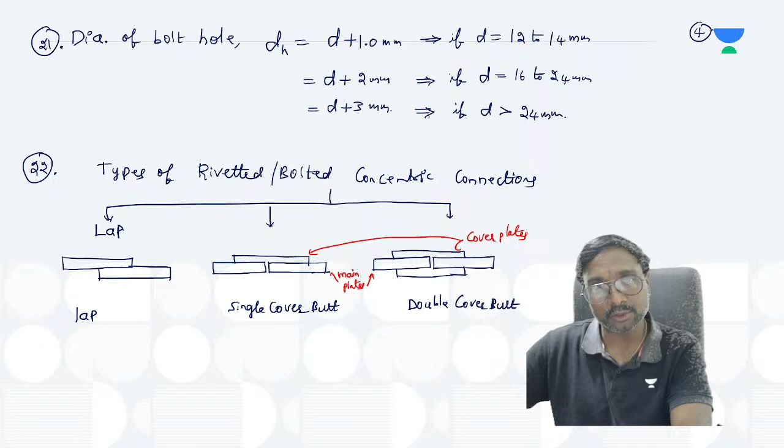And now here, what is the thickness of the cover plate? We have to take it as 1.25 times the thickness of the main plate. For which one? Whenever it is a single cover butt joint. So now the thickness of the cover plate, whenever it is a double cover butt joint, how much we have to take it, tell me?

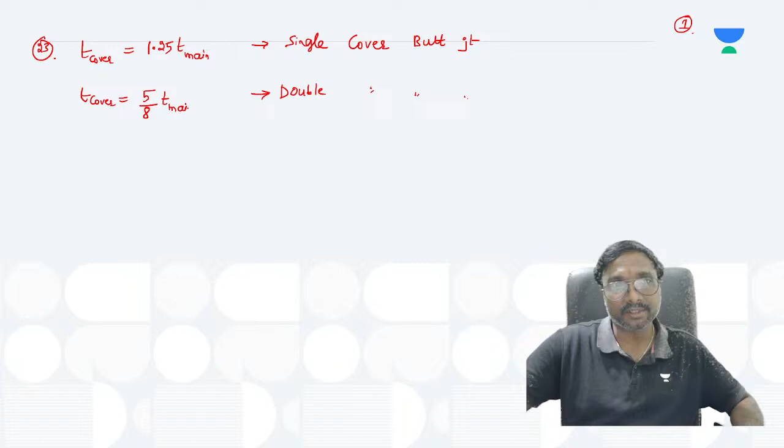If it is a single cover butt joint, like that, if it is a double cover butt joint, how much we have to take it? That is 5/8 times the thickness of the main plate. Yes or no? 5/8 times the thickness of the main plate if it is a double cover butt joint. Is it clear now? So that is the thickness of the cover plates we have to go for.

Now here, if you just observe, shall we go for this specification? If you consider what is the minimum pitch, small p is the symbol we are giving for this pitch. What is the minimum pitch? You can say it is 2.5 times phi. What is the shank diameter of this rivet given? You can say it is 2.5 times phi in case of rivet, and in case of bolt it is 2.5 times small d.

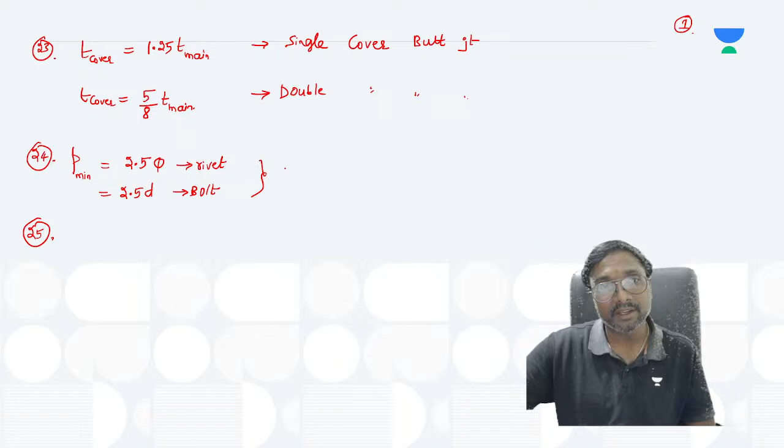Right, isn't it? Now if you observe, what is the next specification? You can say it is not d naught, it is d only. Nominal diameter, right? What is this? That small d or this phi, you can say these are the nominal diameters, not the gross diameters, if you just observe.

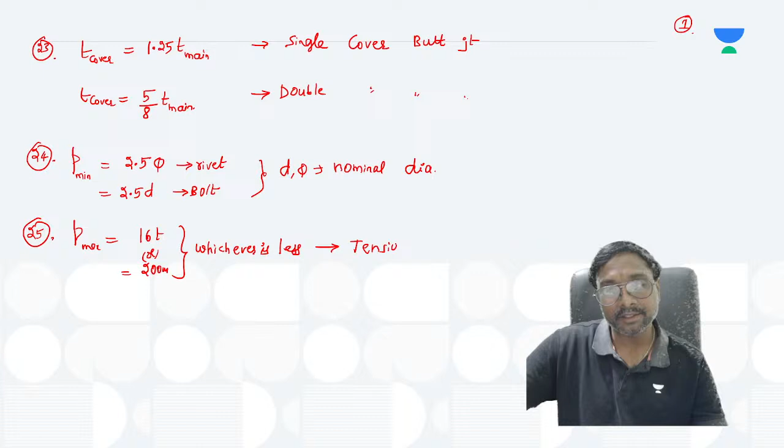So what is that P maximum? If you observe, that maximum pitch will be equal to how much? That is your 16T or 200 millimeter, whichever is less, for tension members. Whenever it is a tension member, we have to go for this. Now there is one more criteria.

What is the P maximum? You can say that is your 12T or 200 millimeter, whichever is less. So here also, whichever is less, is it for this tension member or for compression members? That is for your compression members, you can say, if you just observe.

I'll move on to the next specification. That maximum pitch only, these are for which one? These main rivets, these are for main rivets in connection, right? The rivets which are present in connection. Rivets or these bolts, whatever it is, which are present in the connection.

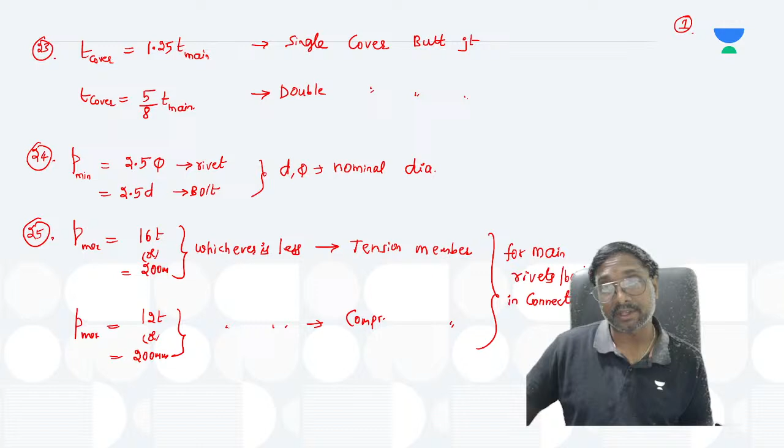As per IS 800 1984 and as per IS 800 2007, both codes, for bolts and rivets, this maximum pitch and this minimum pitch values will be the same only, you can see if you just observe.

So what is the next point? That is your 25th point. Now we will go for the 26th point. If you observe, what is the 26th point? So here, that P maximum, what is the P maximum we have to go for? That is your 32T or 300 millimeter, right? Which one we have to consider among these two? Whichever is less. This is in case of what?

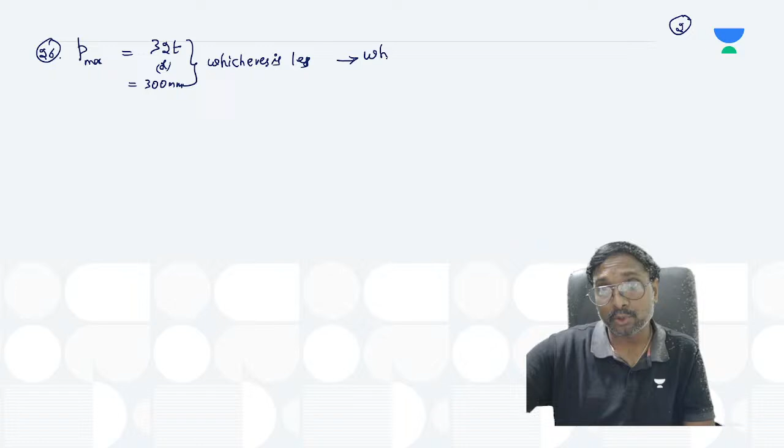This is when plates are not exposed to weather. When plates means connecting members only. When plates are exposed to weather or not exposed to weather - when plates are not exposed to weather, you can have more gap between them also, there is no issue.

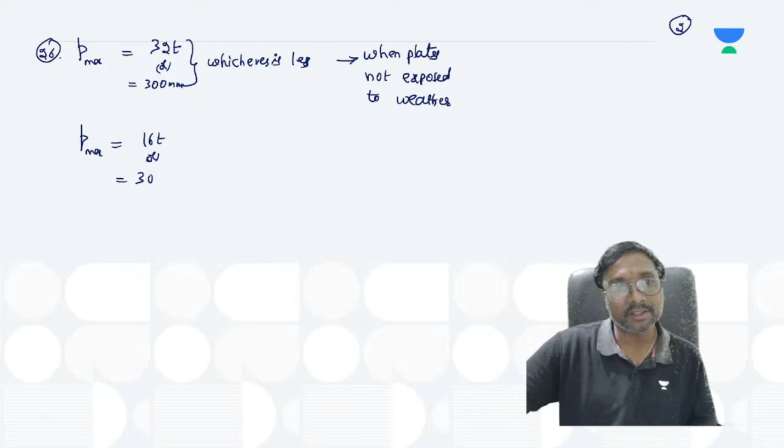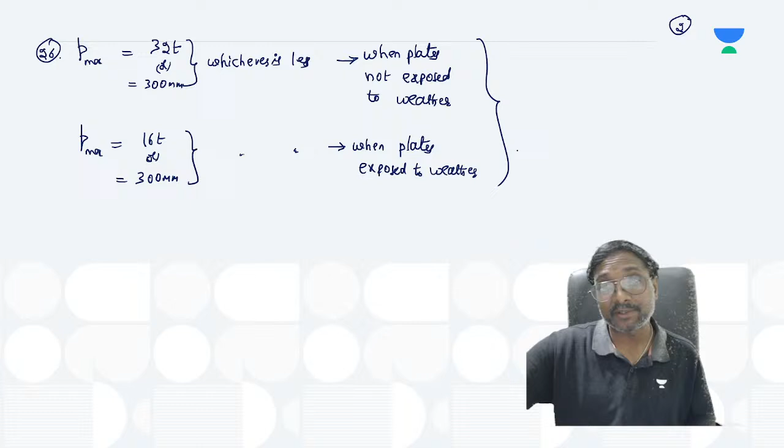Now how much do we have to take it? If you observe, that is your 16T or 300 millimeter, whichever is less. When do we go for this, when plates are exposed to weather? So these specifications are applicable for which one? Tell me, these are for the main rivets or these are for the tack or stitch rivets?

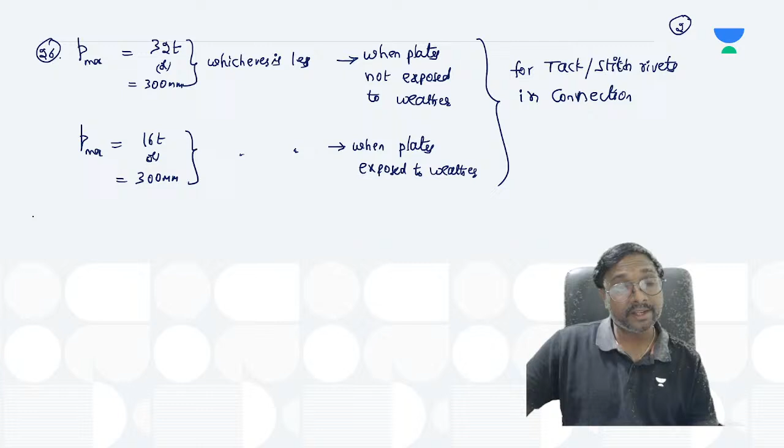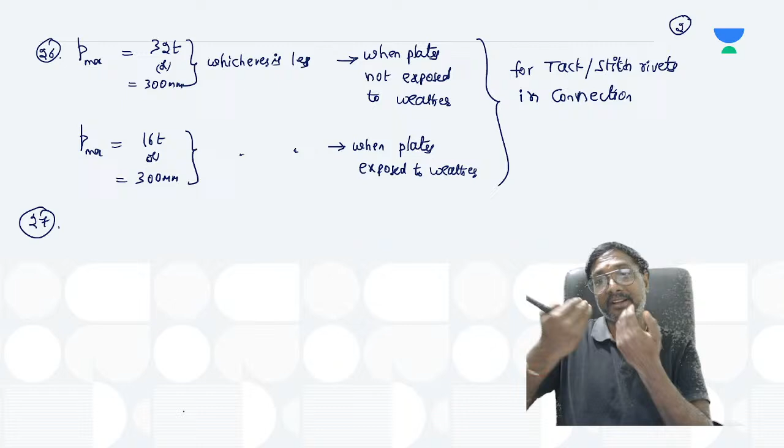Now there is one more maximum pitch value. What is that? If you observe, suppose 2-3 members are there, these are your angle members. Whenever these are connected throughout the length, there will be a tacking rivet outside the connection we have to provide just to hold the two members together, in case of this built-up section.

So now what is that maximum pitch we have to go for? P max should not be greater than which one? This is 600 millimeter for compression members.

And it should not be greater than which one? This 1000 millimeter - it should not be greater than this for which members? That is for tension members. So now this is for which one? These are also for tack rivets only.

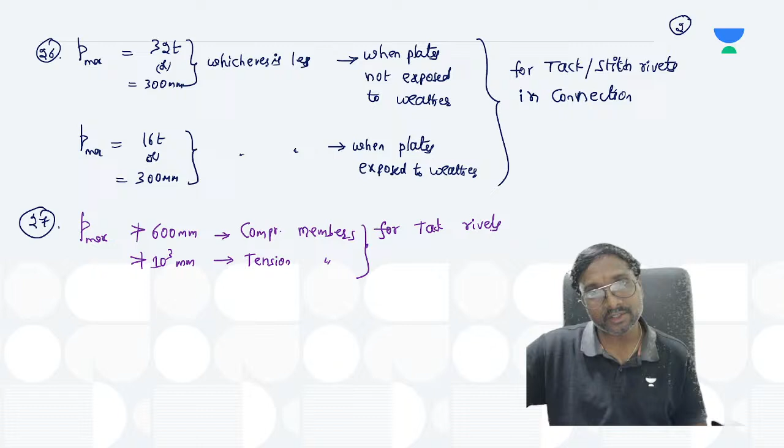Tack or stitch rivets holding the members, where they are provided, holding members of a built-up section together. They are within the connection or outside the connection - they are not present in this connection, if you observe.

Now what is that next point? Here, what is the minimum end distance? If you observe, E minimum will be taken equal to 1.5 times the DH, diameter of the hole, or that is also taken as 1.7 times the diameter of the hole.

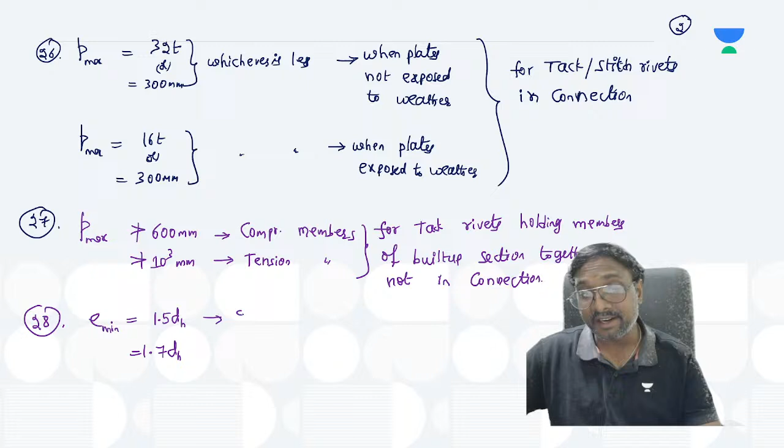When do we have to go for this 1.5 times? When edges are machine flame cut. I'll show the diagram, don't worry. So when edges are hand cut, if you observe.

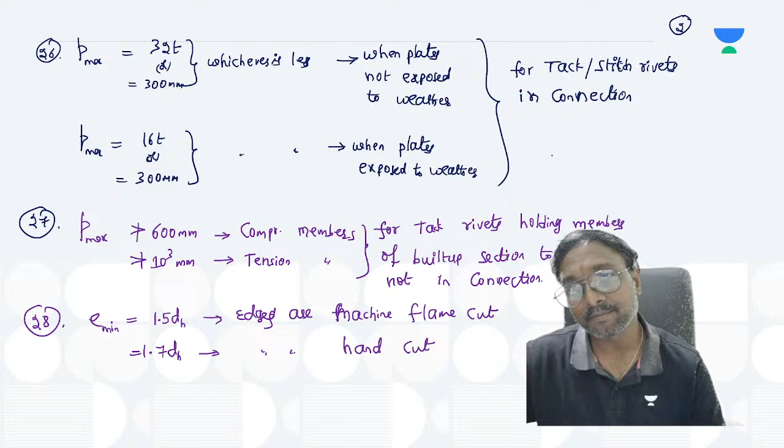So the 27th diagram, if you observe, let us say this is the gusset plate you are having, just for an example. This is one angle present, and this is one more angle present. So these are the main members, if you just consider it.

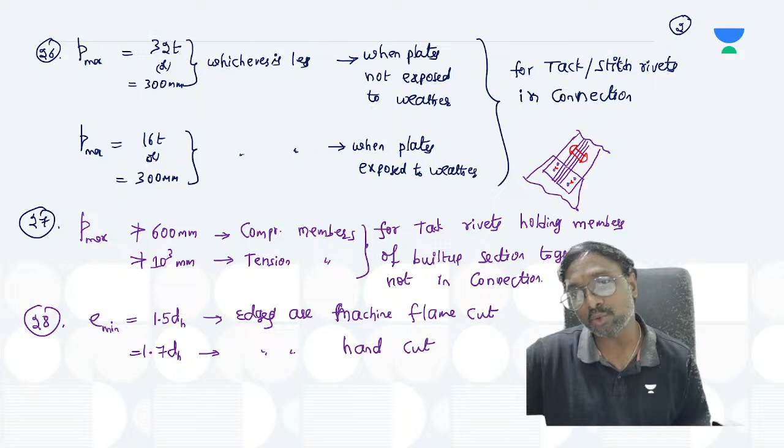If you observe here, which rivets are we having? These are your tack rivets you are having, in between, if they are provided. And here these rivets, these tack rivets or tack bolts, they are holding the two members together. So it is applicable for these. They are outside the connection with the gusset plate. Now clear? Outside that connection only.

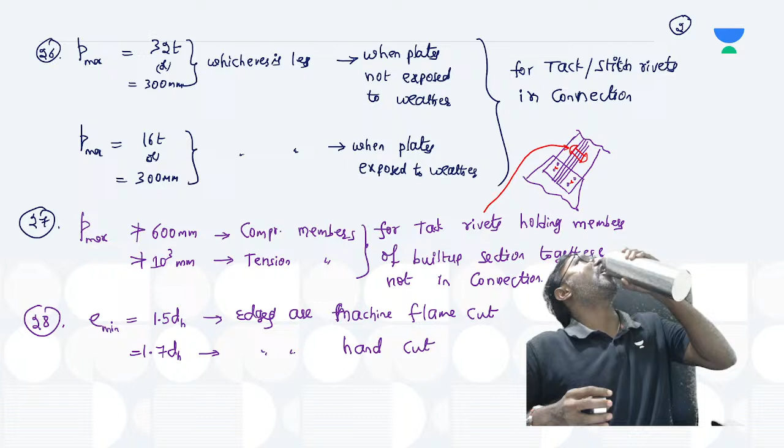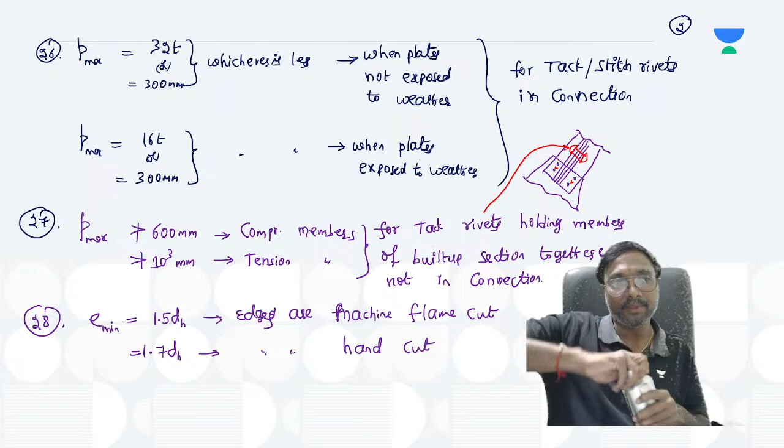So next I'll be moving on to the 29th point. Here, what is the maximum edge distance or end distance? E maximum is equal to which one? That is your 12T epsilon.

What is that epsilon? 12T epsilon or this 40 plus 4T - whichever is there, you have to consider, whichever is lesser. Maximum limit means whichever is lesser.

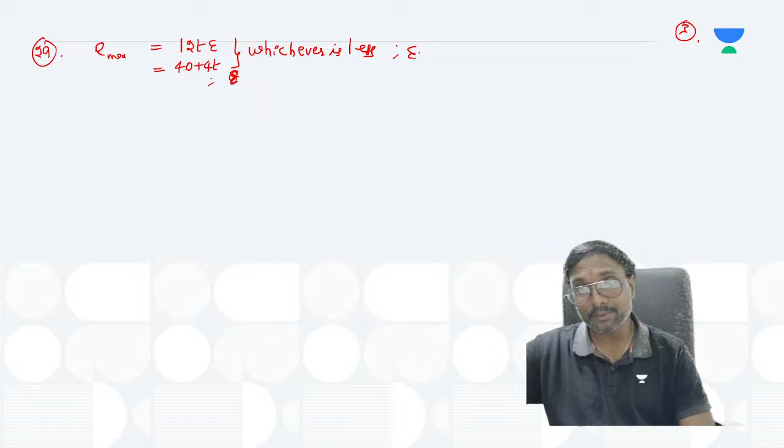Now what is the epsilon? If you observe, epsilon is nothing but under root of 250 divided by Fy, yield strength of the member connected. That is yield strength of this member connected, if you observe.

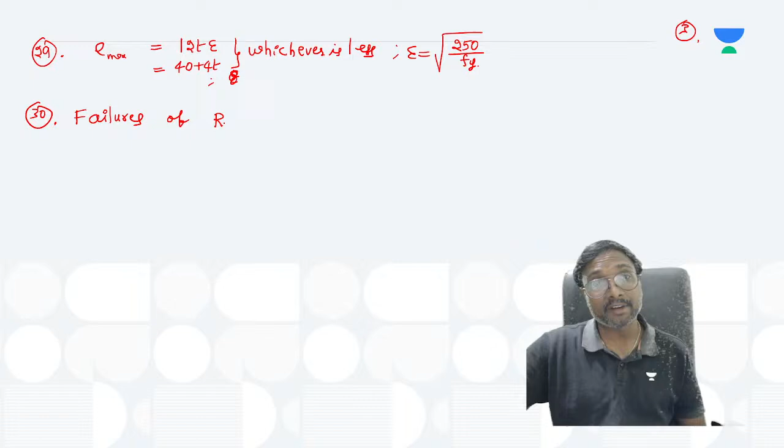Now if you observe, there are different failures you will be having. What are the different failures of this riveted connection? Failures of this riveted or bolted connection, what is it?

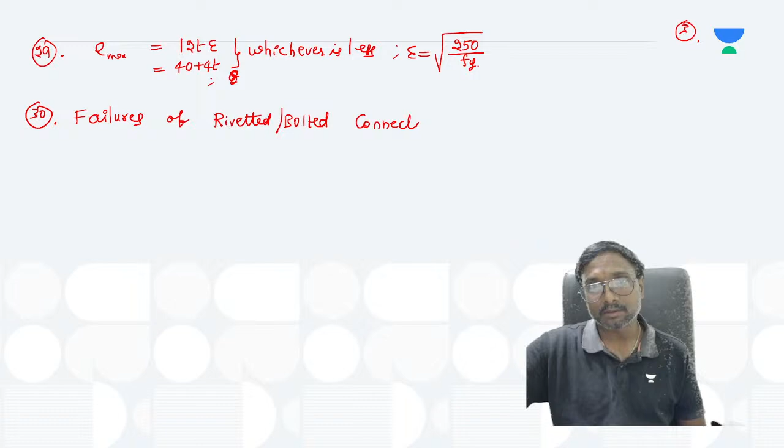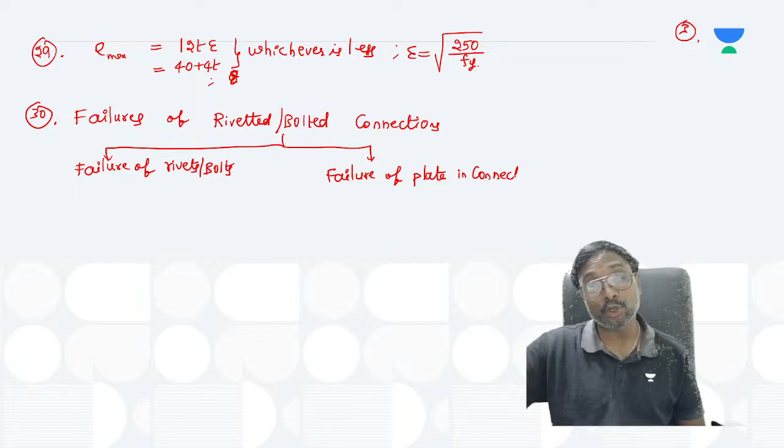So what is the first and foremost? Failure of the rivets or bolts. Next, what is another one? That is your failure of the plate. Which plate? Failure of this plate in the connection only. So we should consider the failure of this plate inside the connection only we have to consider.

Now what are the different failures of this rivet? That is your shear failure. Shear failure means it will be cut into pieces - the rivet will be cut into two pieces or not.

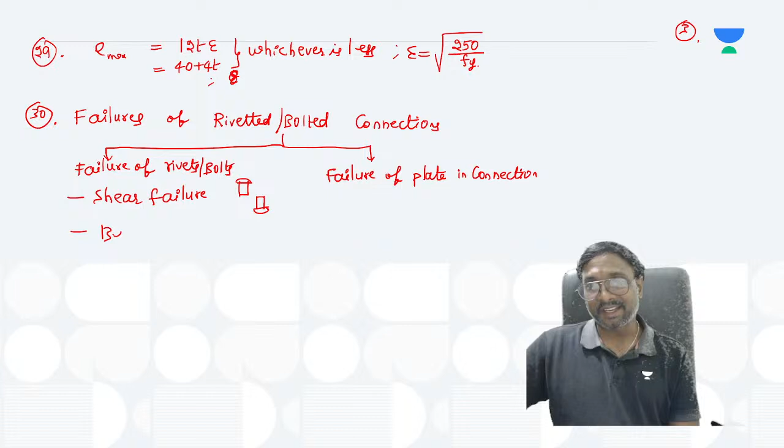The next one, what is there? That is bearing failure of this rivet or bolt - for bolt and rivet it's the same. So what is the bearing failure? Whenever I am showing for the rivet, it is applicable for the bolt also.

This kind of pressing will happen, right? What is another one you can observe in this bearing failure of the plate also? For the plate, there is a bearing failure. How does it occur? Whenever there is a rivet hole or bolt hole, when the bolt or rivet is stronger, it will press the plate, then the plate will be subjected to this pressing, crushing, or warping.

Now here, what can you say? Which one will we be considering? This is a tearing failure. Generally, which failure do we consider? A tearing or tension failure we will consider. Other failures we don't consider.

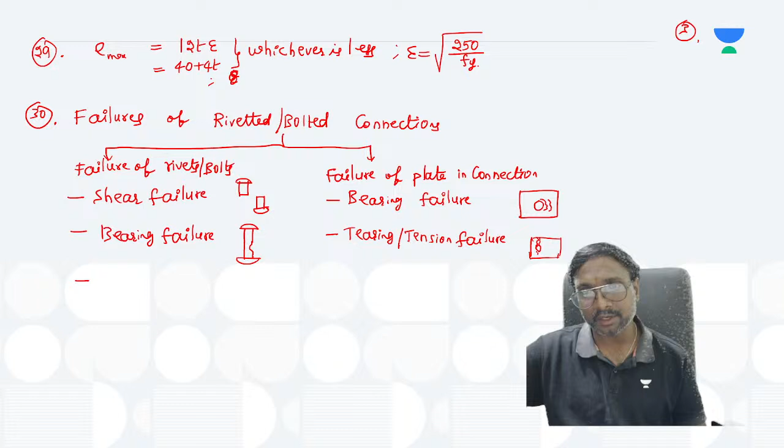Tearing or tension failure means, what can you observe? This is what you are having, and this is how it will be subjected to cracking. That is your tearing or tension failure. This is how the tension is applied, and it will be subjected to cracking like that, as you can observe.

Next, what is in that? Tension failure in the bolt you are having now. What is the tension failure in the bolt or rivet? Whether it is yielding or which one, tell me. Rupture, right? Or it is a rupture like this under the tension. So these are the different failures we are having, as you can observe.

Like that it will be happening. Now, let's observe here, what do we have to consider now? Tell me. Permissible stresses in workshop rivets, okay? We will write this as permissible stresses.

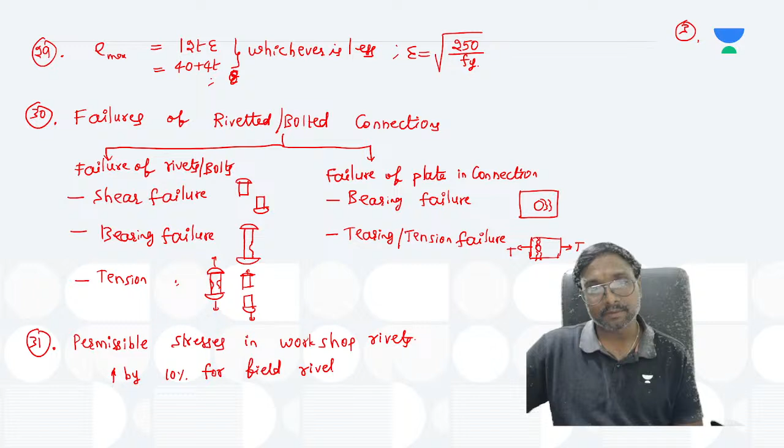Workshop rivets. So these values are to be decreased by which one? This is 10% for field rivets, as you can observe. And these are further increased by which one? This is 25%, tell me, if the effect of wind or earthquake is considered.

If the effect of wind or earthquake is considered, then we have to increase these values by 25%. For field riveting, we have to decrease those values by 10% only. Note these points and tell me. Then I'll write these permissible stress values in the next slide.

What and tell me? This is done.

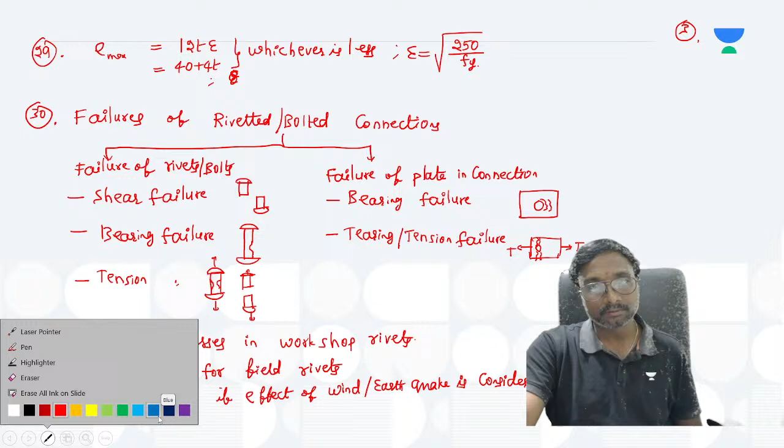Right now, if you observe here, what is it? You can say that is the type of rivet. Which type of rivet can you say, as you observe that is a type of rivet? That is your axial tension.

Actually, in case of field rivets, sorry, these are decreased, right? Sorry, here it is decreased. In case of field rivets, these are not increased, those are decreased, right? I have written it by mistake. In case of field rivets, those are decreased, not increased, you can say.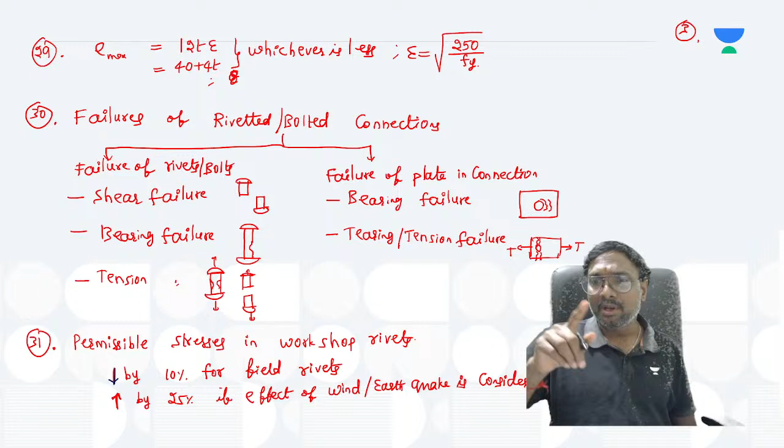So if you observe, in which rivets will the strength be higher, field rivets or workshop rivets? Strength in the shop riveting condition will be higher because expert people will be available there, so we can do that riveting properly. So in field riveting, what happens? Normal people will be doing it, that much expertise may not be available, so they will be having lesser strength. Lesser strength means it is better we should allow lesser stresses. That is why these are decreased by 10%.

Earthquake and wind, do you remember that? Yes, in yesterday's class, when I was mentioning that 0.9 reason, what is that? Whenever these vertical loads, dead load and live load, are considered...

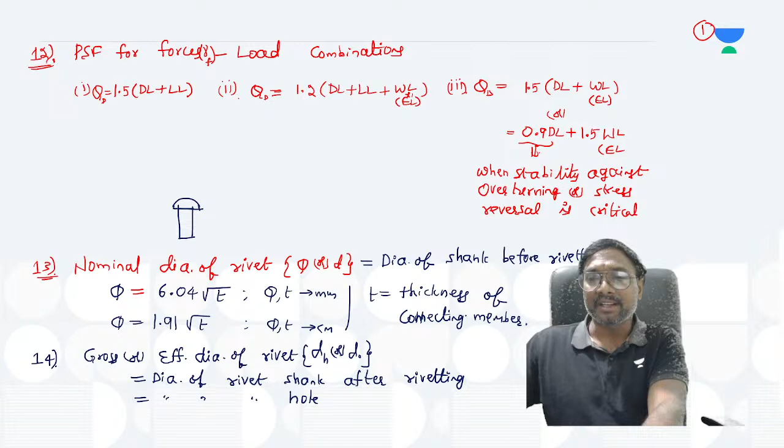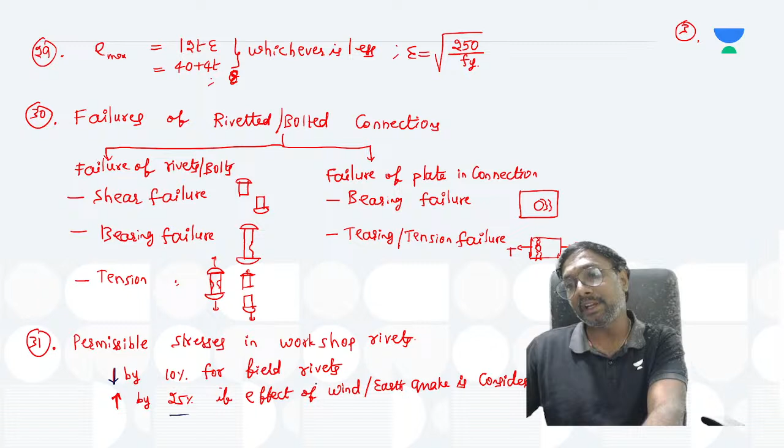These are vertical loads. Earthquake and wind loads are which one? These are lateral loads for the structure. Whenever one is creating stability against the other, what happens? One will be counteracting the effect of the other, so the net effect will be reduced. Net effect reduced means even if you allow higher stresses, it will not fail. That is why we allow higher stresses in the case of wind and earthquake lateral load conditions. Is it clear, Sanjeev?

No. Is it clear? So that is what we are doing. Axial tension: what is the symbol we are giving for axial tension? Tell me. What is the symbol we are giving?

Now, axial tension. Next, shear. And what is it? Bearing. What is the bearing symbol we are giving? You can say if you just observe. Sigma PF is the symbol we give for bearing. Tau VF is the symbol we give for shear. And axial tension, what is the symbol? Sigma A, right? Sigma AT you can say.

Axial tension. What is the type of rivet? If it is power driven... Do you remember power driven or hand driven, which one will have more strength? Obviously power driven will have more strength. So here it is 100 MPa, this is 100 MPa, and this one is 300 MPa.

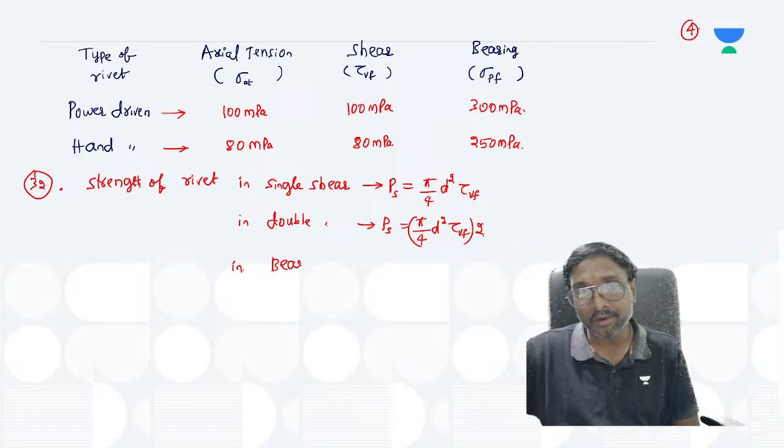And in bearing, if we consider, what is the strength of the rivet in bearing? PB is the symbol we are giving. That is d into t into sigma PF, if you just observe.

Now tell me, what is the rivet value? The rivet value RV will be equal to the smaller of PS and PB only. Smaller of PS and PB only we are considering.

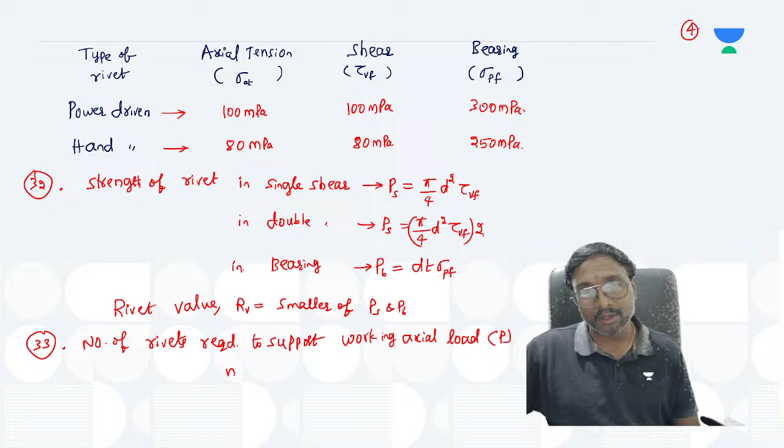What is the number of rivets required to support a connection, to support a working axial load? The working axial load is P. N will be equal to the working axial load P divided by the rivet value. That gives the number of rivets, isn't it?

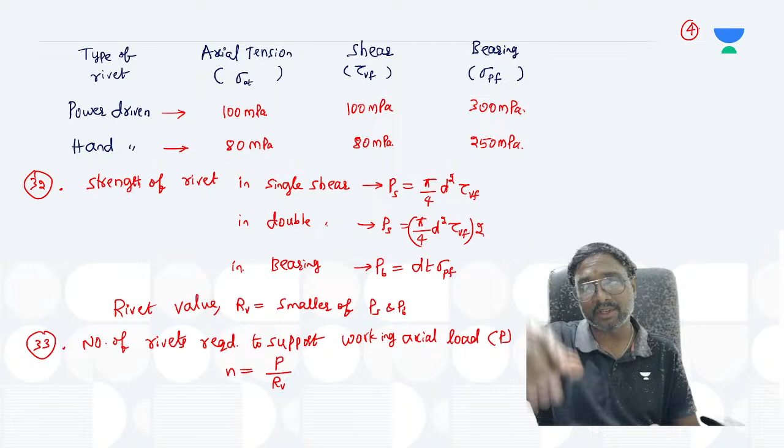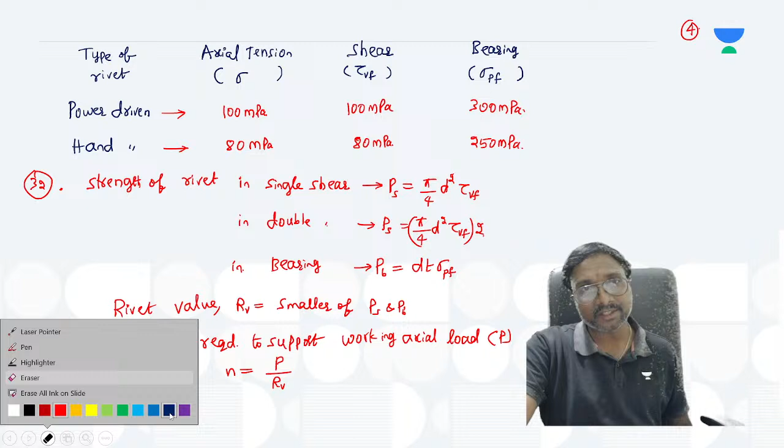Actually sigma AF we will write, because sigma AT is already used for axial tension in main members. So here we will use sigma AF, axial stress in the fasteners. That would be better. We don't consider this; only shear and bearing come into the picture. Note this and tell me.

Right? Now, what is it if you just observe? This is your 34. Tensile strength of this plate, right? What is the tensile strength of this plate? If we just observe, the tensile strength of this plate will be which one? PT. What is the PT? It is nothing but your A net into sigma AT, right?

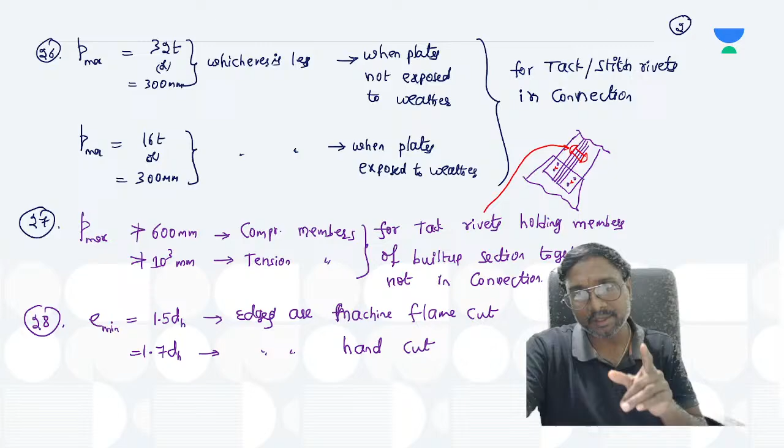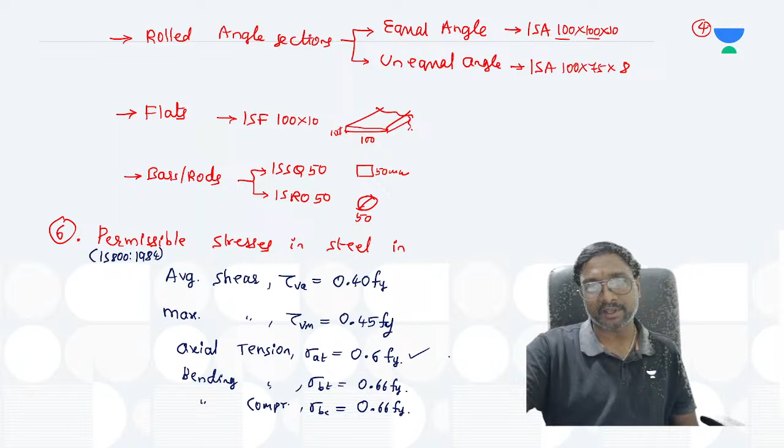Do you remember the permissible stress in axial tension in the plate? Do you remember these values, everyone? In the first class we mentioned them. Sigma AT, what is that? 0.6 Fy for sigma AT. Permissible stresses in steel, we mentioned them. Yes or no? That is for the main members. That value only we have to use here.

So what is that? It is B, the width of the plate, minus N1, the number of rivets in the section considered, into the diameter of the hole, into the thickness T, into sigma AT. Is it right or not?

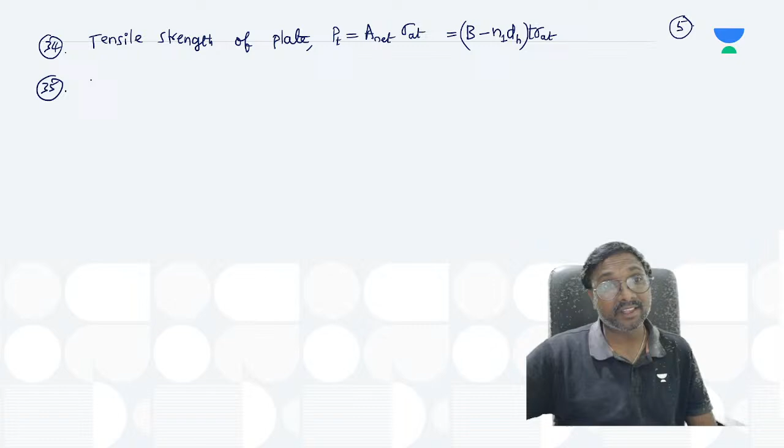Right, now, strength of the riveted joint. What is the strength of this riveted joint? The strength of this connection, PC or PJ, will be equal to N into PS, or N into PB, or the tensile strength of the plate, whichever is lesser.

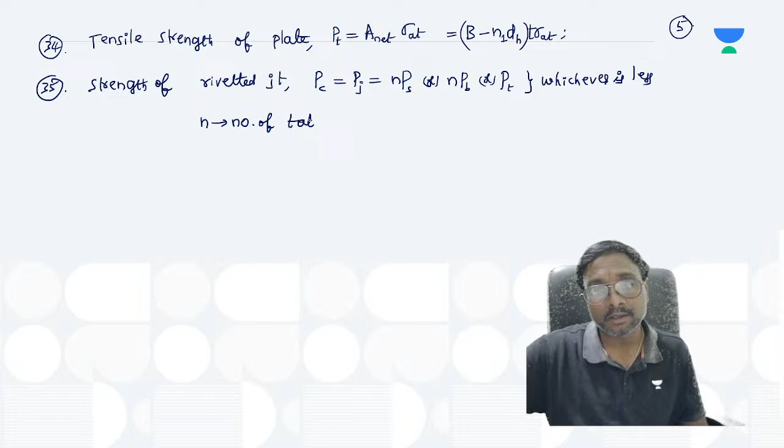So what is N1? Okay, I'll write that. Here N is the number of total rivets in the connection. Now what is the N1 mentioned above? That is the number of rivets along the section considered: whatever section you consider, how many rivets are along that section.

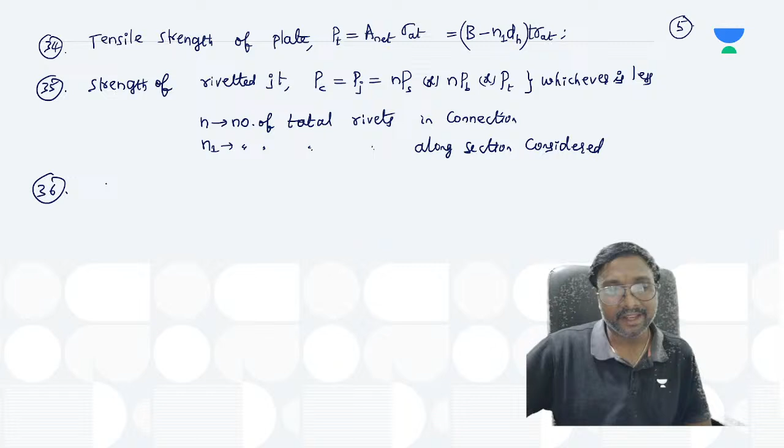Now, efficiency of the joint. What is the symbol? Eta is the symbol for efficiency. That is the strength of the connection divided by PSP, into 100. What is PSP? PSP is the strength of what plate? Tell me.

Strength of the solid plate. What is the strength of the solid plate? A gross into sigma AT. What is A gross? Tell me. It is simply width into thickness, right? Into sigma AT. Isn't it?

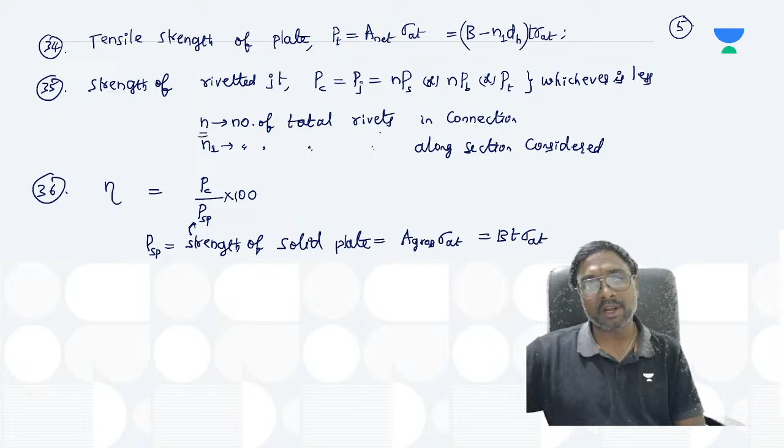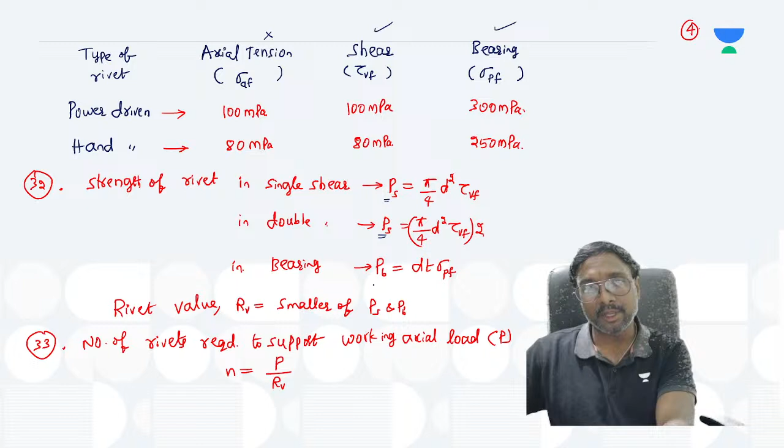Where is the PSP I have written? Okay, yeah, connecting plate, main plate. It is not the gusset plate, it is the main plate. So N is the number of total rivets in the connection. What is PS? PS is the shear strength of the rivet in single shear or double shear. PB is the strength of the rivet in bearing. Got it?

N is the total number of rivets into the shear strength of one rivet, or N into the strength of a single rivet in bearing. Understood now, Sanjeev? Is it clear? So like that we will have it.

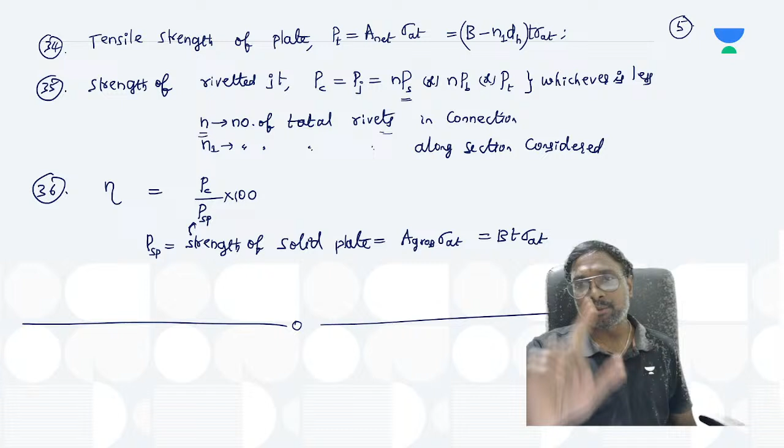Then in riveted connection strength, the only thing left is the eccentric connections. One more class and mostly the connections will be completed. Concentric connections will be completed in one more class, eccentric connections in one class. Like that we'll do.